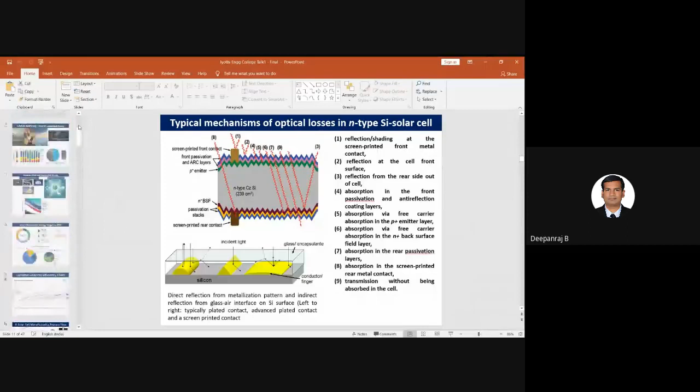Can you see? Yes, ma'am. It is visible. Can you see the first slide? Yes, ma'am. It is clear.

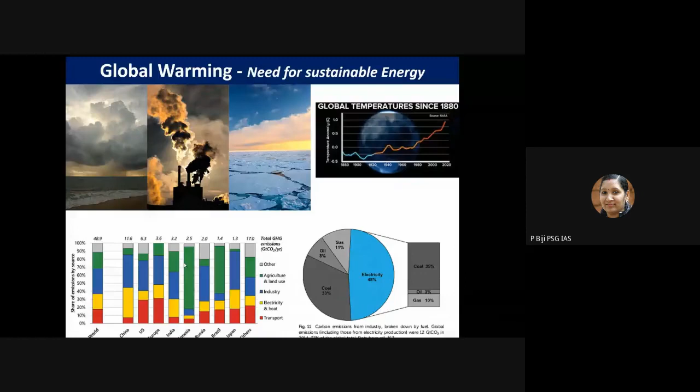This chart shows the percentage share of contributions of carbon dioxide emissions from various sources in different countries. Majorly, the main source of carbon dioxide or greenhouse gas emission is the production of electricity and burning of fossil fuels or coal for various industrial and electricity applications. So the major culprit, of course, is fossil fuels, which is also depleting at a very fast rate at present.

Obviously, we have started thinking about alternate renewable technologies in order to reduce the impact of global warming. As you know, the population is increasing, and hence our energy demand is also increasing. Although non-renewable energy sources like coal, oil, gas, or even nuclear power are used to meet our current energy demands, such resources however are not sustainable forever.

So globally, a huge movement has started towards renewable energy resources, such as solar power, wind, hydroelectric power, tidal power, biofuel, etc. Nowadays we have also started using hydrogen as a clean energy fuel, which can be produced from electrolysis of water using solar energy.

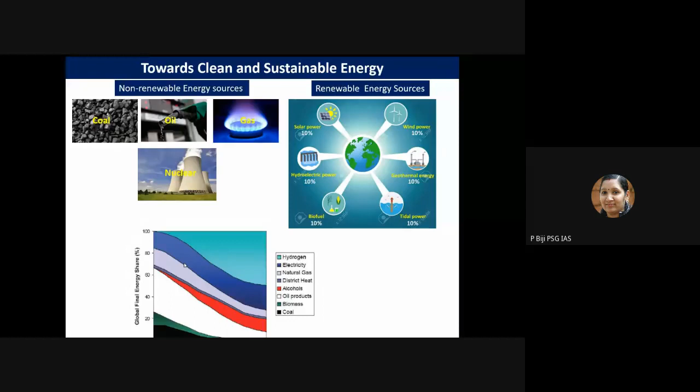Our Government of India has started a huge ambitious target of installing 175 gigawatts of renewable energy capacity by the year 2022, which includes 100 gigawatts from solar, 60 gigawatts from wind, 10 gigawatts from biopower, and 5 gigawatts from small hydropower.

The government has launched several schemes for the promotion and development of renewable energy, including solar energy, in the country from time to time. But at present, India's total installed capacity is around 632 gigawatts, with renewable energy constituting up to around 23%.

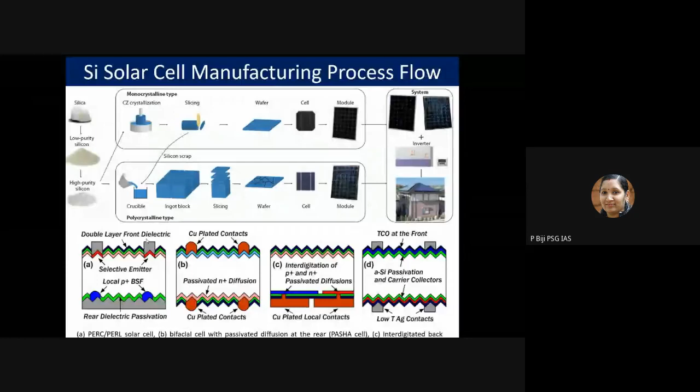I don't want to go into the details of these different types of solar cells, because we need time for our main topic. So let's look at the solar cell manufacturing process flow in a little detail. Once the wafer has been formed, there are several steps involved.

The first step is pre-check or pre-treatment. At this stage, the raw silicon wafer first undergoes a pre-check, during which it is inspected for geometric shape or thickness anomalies, and for damages like cracks, breakages, or scratches present on the wafers.

After the pre-check or pre-treatment process, texturing and cleaning happens. Following the pre-check, the front surface of the silicon wafers is textured, basically to reduce the reflection loss of the incident light. The most common technique is random pyramidal texturing.

After texturing, the wafers undergo acid cleaning. In this step, any post-texturing particles remaining on the wafer are removed from the surface, because the next stage is diffusion. Diffusion is basically the doping, to make the silicon wafer more electrically conductive.

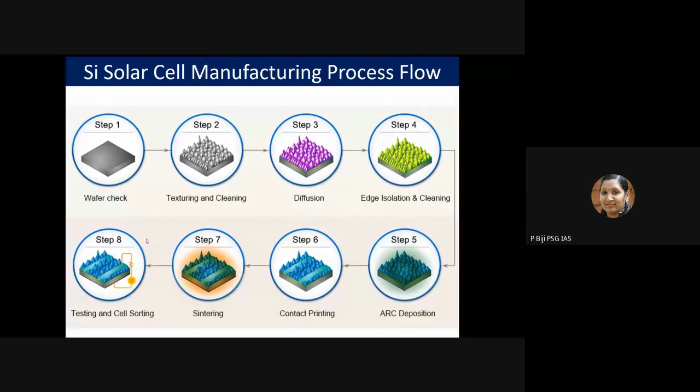Now, having understood the manufacturing of the solar cell, let's slowly come to our topic: why this metallization is so important. I want to give you some basic introduction.

This is basically to reduce the optical losses. Losses in a solar cell occur in two different ways: one is optical loss, and the second is electrical loss. Electrical loss is basically the ohmic losses or recombination losses. These two losses depend on the materials used in the silicon solar cell. I don't want to explain more about electrical losses right now.

I want to concentrate on the optical loss. The optical loss basically happens from reflection loss, then shadow loss, or some radiation - photons which will not have been absorbed in the solar cell.

So because of that, some parasitic absorption, parasitic reflection happens. That also contributes towards the optical loss. So let's see more about this.

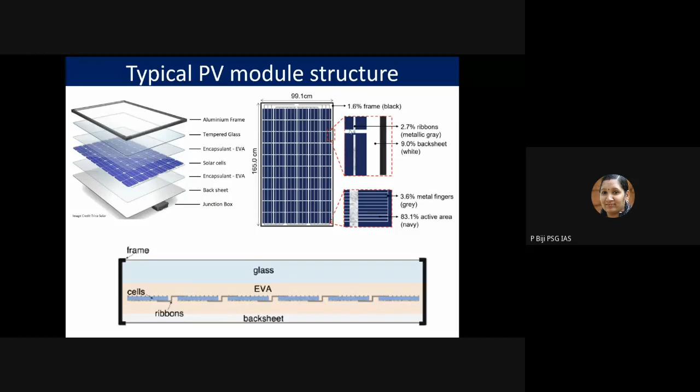Now let's see. We have seen the basic optical losses in the case of a solar cell, but once it is manufactured and assembled as a solar PV module, you have to consider several other contributions towards optical losses also.

The solar cover glass also contributes towards the reflection loss, and the glass can contribute towards the parasitic absorption loss. I have shown some numbers here for these different types of losses.

The third one is the EVA parasitic absorption loss. But of course, these losses are coming from the active areas, which means the exposed silicon area.

This red highlighted ones, like the shading loss of metal fingers, the cell gap photon loss, shading loss from the interconnections and ribbons - these three losses are basically coming from the inactive areas, like metal fingers, ribbons, backsheet, or the frame. From that also the optical losses can happen. So that's the inactive area.

Then further, the front surface reflection loss, parasitic absorption loss in the cells, and front surface escape loss - that's the active areas again, related to your solar cell, which we have already discussed earlier.

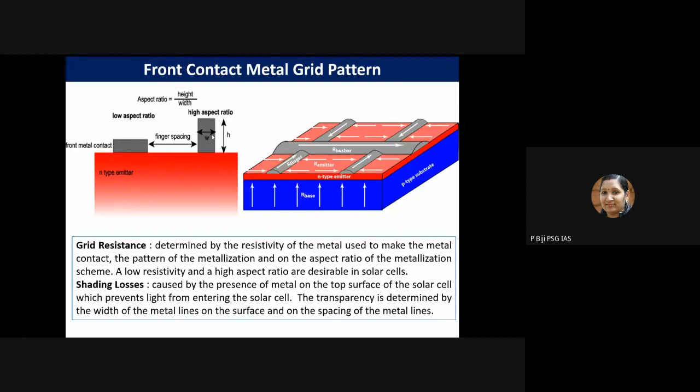Currently screen printing is used, but although it's a mature technology, it has its own limitations. For example, the latest technologies can print almost 30 micrometer line width, but if they try to reduce the finger width further, the finger breaks or interruptions happen, so the technology is not fully successful at this end. A narrow metal line width and closer finger spacing can reduce the emitter resistance loss. That's the basic idea of this front contact metal grid pattern.

Now let's see the overall top surface of this solar cell. Metallization involves several metal line fingers which collect the current from the emitter, and there are bus bars which are interconnected vertically, crossing all these metal lines. That actually transmits the current towards the external load.

If you see this particular figure, it shows the various major components of series resistance in the screen printed or other printed front contact of the solar cell. The series resistance increases from contributions of the sheet resistance of the p-type emitter layer, mentioned as R emitter, and the N back surface field layer, then the bulk resistance of the N-type wafer, contribution from the substrate, then the metallic resistance of the front grid line and rear grid line, then the contact resistance between the screen printed metal contacts and silicon on front and rear sides. The fifth contribution is from the metallic resistance of the front bus bar and rear bus bar. All these different types of resistance contribute towards the series resistance in front contact metal lines, so we need to reduce this resistance also.

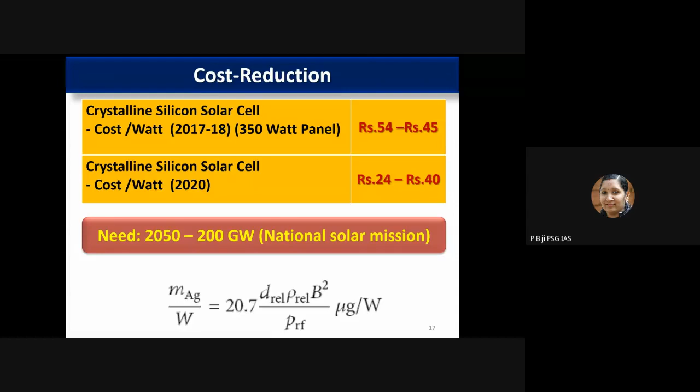As an alternative to reducing silver consumption at the cell manufacturing level, silver should be replaced on a large scale by more effective materials. If you consider copper, that's a very good substitute, but copper has its own disadvantages that we will discuss. However, we can also improve and face that challenge, so I will show you later how copper can be used as an alternative.

The delay in introducing copper into mass production is due to several reasons. You need to face many other technical challenges related to reliability and adhesion, so there are many other challenges which have to be resolved. Only then will solar cell manufacturing technology widely accept this as an alternative to screen printing of silver paste. Appropriate equipment and processes are also required.

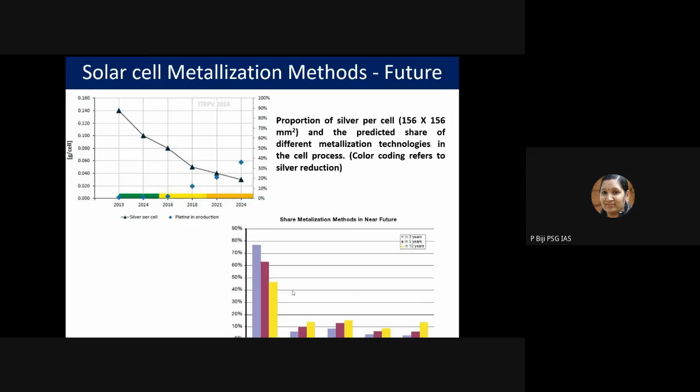Now we'll see the factors influencing cell efficiency and metallization cost. Efficiency can be improved either by improving the current density or by improving the fill factor. Current density can be improved by decreasing the finger width for reduced shadow loss, which is something very interesting for us.

The second one is how to improve the fill factor, basically by reducing the contact resistivity, reducing the line resistance, and improving the aspect ratio. Aspect ratio improvement is a little challenging, but with appropriate technologies it is possible. You can reduce the finger width as well as increase the aspect ratio, thereby contributing majorly to efficiency enhancement.

Now considering cost, how can you reduce it? You have to either replace silver screen printing—but if you reduce it, the cell performance may be affected and other technologies are not so mature—or you can think of a less-silver process. You can reduce silver consumption by adopting various methods available to reduce silver usage.

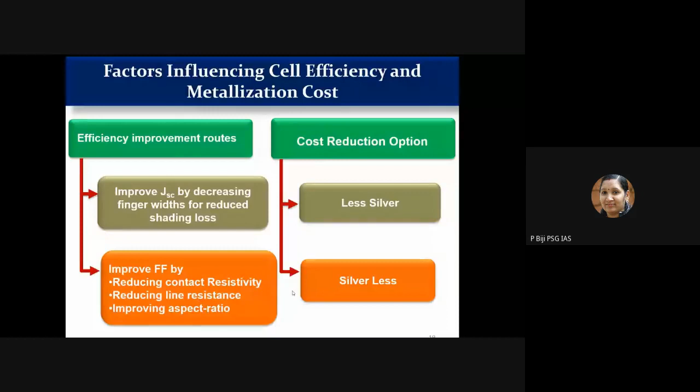What you have to do is alternative metallization. This means using comparable metallization without compromising conductivity, but at the same time the cost of the metal should be very low. So obviously we will look towards copper. Before going to alternative metallization, I want to show you some glimpses of the technologies used for metallization of silicon solar cells.

Before that, since all of you know screen printing is the major technology, we'll discuss it in a little detail. But first I want to show you glimpses of alternative printing technologies used for solar cell front contact metallization.

The first one is inkjet printing, which most of you must be familiar with. In this technology, a continuous jet mode stream of ink is ejected under high pressure through the nozzle. This stream disintegrates into a train of droplets directed by electrical signals. Droplets that are not used are diverted by the electric field and collected by a gutter, where they can be reused. The droplets ejected through the nozzle tip are directed onto the surface using a piezo drive, with XYZ movement achieved electrically, allowing you to print the desired metallization pattern on the silicon solar cell.

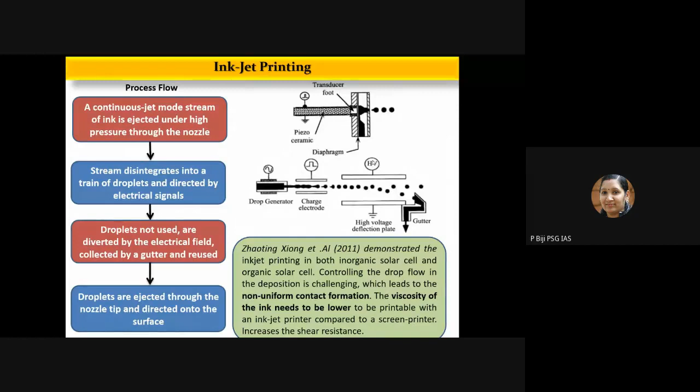The next process is pad printing. In this case, a photopolymer plate with the print image or design is etched into the surface, which is then mounted on the machine by means of a magnetic plate holder.

A blade spreads ink from the ink reservoir over the plate, filling the etched areas. This is a thin film technology, basically the spreading of the ink. The doctor blade moves down and retracts the ink from the surface, leaving ink just in the etched areas.

Then the solvents in the paste start to evaporate and the surface becomes a little tacky. The pad moves downwards onto the plate and rolls across its surface, which has a roundish shape. This rounded surface is important as it prevents air from being trapped between the pad and the plate surface. So when the pad moves upwards, some of the ink sticks to it.

At this point, some of the solvents evaporate from the surface of the paste adhering to the pad, making it a little sticky. Then the plate is moved away from the pad and the pad moves downwards onto the substrate. The ink sticks onto the surface of the wafer and is released from the pad as the pad lifts upwards. That's the main process flow adopted in pad printing.

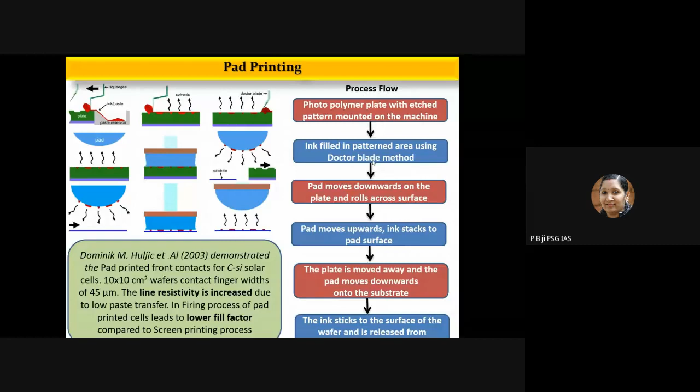Although there are some reports on this pad printing, the line resistivity is increased due to low paste transfer. Then during the firing process, pad printed cells lead to lower fill factor. Obviously, if the fill factor is lower, the performance of the solar cell is not very good, so this was not a widely accepted technology.

The next technology is aerosol jet printing. In this case, there is a metal aerosol jet printer, which is a non-contact system, allowing printing on thin and fragile wafers. At present, most silicon solar cells are very fragile and very thin, so this technology is advantageous for such wafers.

It can also print on wafers having uneven surfaces. The aerosol is transported to the deposition head via a heatable tube, where the viscosity of the aerosol can be controlled. One important component of the ink for solar cell metallization is metal loading in the form of nanoparticle ink—nickel, chromium, titanium, etc.—which could be the materials of first choice for the contact layer.

Again in this case, although this technology is very good for making narrow line width features—up to around 15 micrometers feature size can be obtained very easily using aerosol jet printing—the problem is that the aerosol ink, the nano ink used to produce the aerosol, is expensive, and overall the technology is costly for large area industrial manufacturing. That's why this technology also was not so successful, although it has some good advantages.

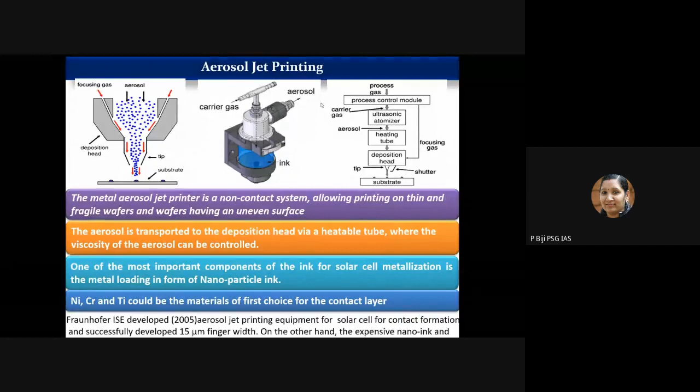The next process is co-extrusion printing. In this case, the co-extrusion print head consists of a multi-layer nozzle assembly clamped between two sealing plate structures. A manifold plate distributes and splits two extrusion materials—a silver grid-line paste and a kind of sacrificial paste. Again, in this case, you can create high aspect ratio features very easily.

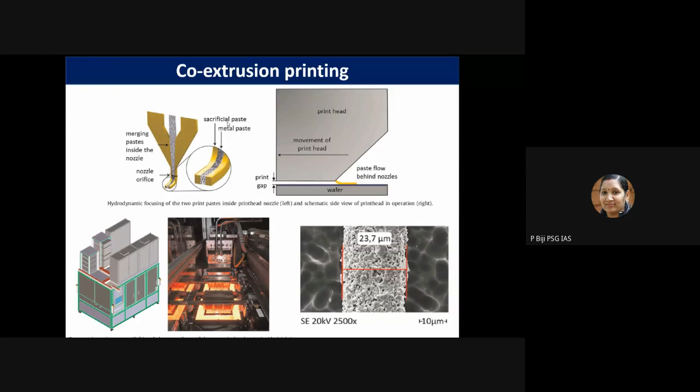Once the line is deposited over the wafer, the sacrificial paste prevents lateral spreading of the metal paste, which enables the aspect ratio. This technology is very good for creating high aspect ratio metal lines, but again the problem is the cost for wider deployment.

This laser beam, with appropriate energy, scans over the particular powder bed. The metal powder is sintered and bonded to the emitter surface.

The main challenge for solar cell metallization is investigating the laser processing parameters—applying enough energy for powder fusing and bonding to the cell surface without damaging the thin, preferably doped emitter surface. It should not be destroyed, but at the same time you can get high aspect ratio as well as narrow line width metallization using this technology. But the processing parameters are very complex, which is why this technology was not so popular.

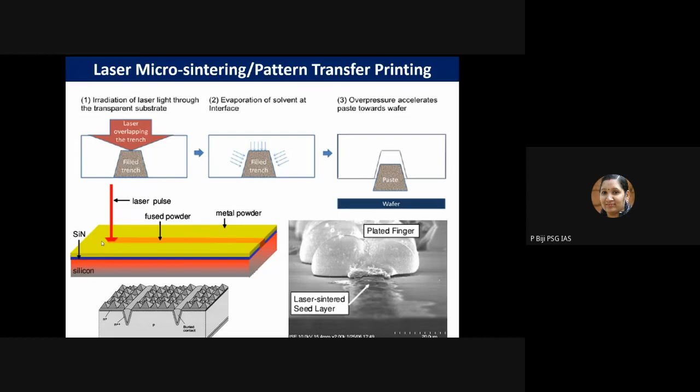And the next important technology is photolithography. Whatever high efficiency silicon solar cells you are seeing in the NREL chart, those kinds of high efficiencies have actually been achieved by adopting photolithography technique. I think some of you must be aware of what is meant by photolithography.

In this case, you need a photoresist, and UV light will be exposed with a desired photo mask. Some part of the photoresist will be hardened, and the other part you can etch out using wet etching or some other physical etching process. Then you can evaporate your metal, and after that wash out whatever resin is present as residual material.

This is a highly precise method for metallization, but unfortunately there are several steps involved, and you need expensive clean room microfabrication facilities for this. So if you adopt this technology for commercial solar cell manufacturing, the cost of the solar cell will be very high. That's one disadvantage of this technology.

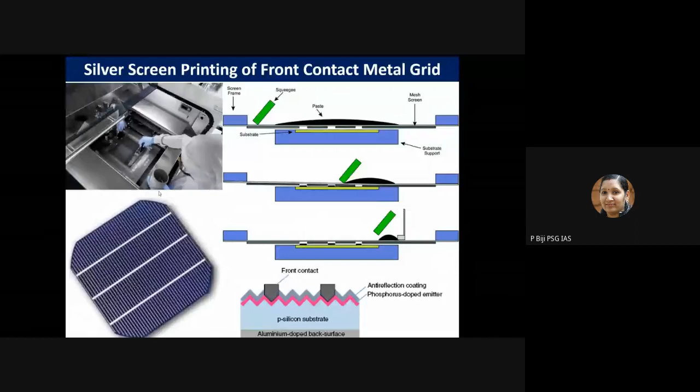Now, if you see the process flow adopted for screen printing for solar cell front contact, I don't want to explain all this texturing, diffusion and all again. In this case, the silver paste also contains aluminium. This aluminium and silver based paste will be screen printed, and then during firing, this silicon nitride will open up, and these metal lines will be in direct contact with the emitter layer. That's how you get very good adhesion, as well as efficient conduction.

Now during this sintering process, initially a drying process will happen, where the solvent burns out, because the silver paste basically contains both inorganic and organic materials. The inorganics are like glass frits and silver powder, along with some polymer additives. The organic matter is like the solvent, because it has to maintain some rheological properties - viscosity has to be optimal - and there will be a resin and some additives as organic matter.

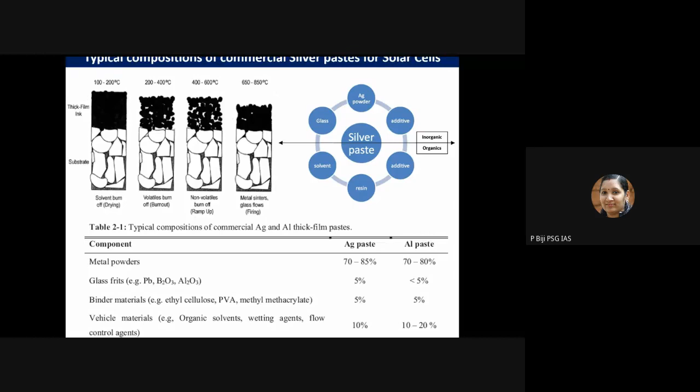So this is what I told, the silver or aluminium. If aluminium is present, some amount of aluminium also will be present, and the glass material will be there. So they will actually form some kind of bimetallic species, and they start to etch out this silicon nitride at its contact, and through that opening, it will be in direct contact with the emitter.

Then the contact also should not be too deep, because the silicon nitride thickness will be around 70 nanometers. It should actually etch out the silicon nitride to have a proper contact, but again it should not over-etch, because that will disrupt the overall process. So there could be some kind of optimal temperature for the sintering process.

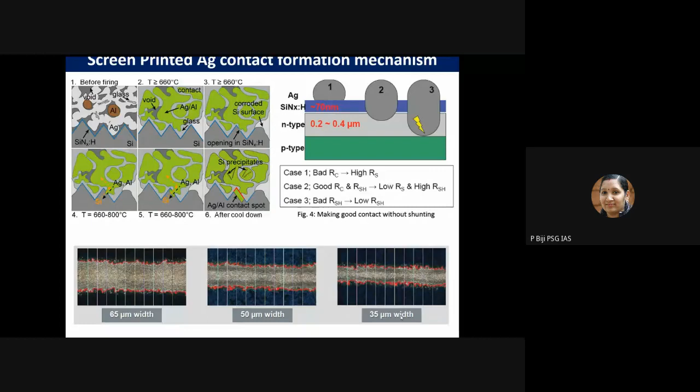Using screen printing, you can see that up to 35 micrometer width finger lines have been printed at this point of time by the latest screen printing technology. So again, advancements are happening. If they are able to reduce the finger width and aspect ratio further, then the technology is okay, good. But still, if you are thinking about cost reduction, you definitely require an alternative metallization process.

During this screen printing process, the agglomeration of silver particles has been observed. The screen opening should be 5 times larger than the particle size, so the silver particle size should be in the range of 3 to 7 micrometers. The finger opening above 35 micrometers is required to avoid screen clogging. So that's one disadvantage, because when you go for narrower line width, the silver particle size reduction becomes another challenge.

So that is something you have to think about. Then another disadvantage is non-uniformity in the fingers. If the lines which are printed are non-uniform, that will increase the shear stress, and that will increase the resistivity of the finger. As you reduce the finger width, the possibility of finger interruptions or finger breaks will be enormous. So that is another challenge to think about. Such non-uniform fingers will increase the series resistance. So these are some of the disadvantages of screen printing of silver paste.

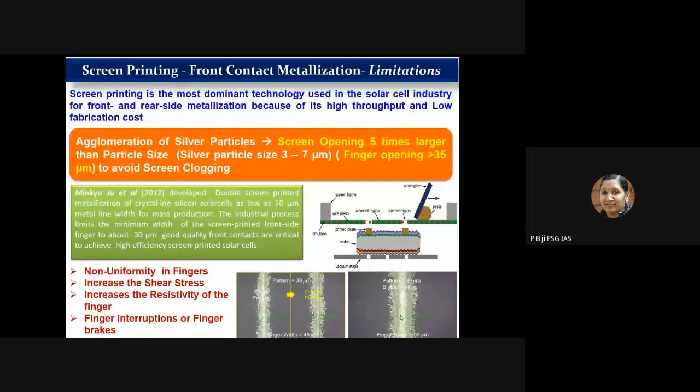As an alternative front contact metallization, some groups have reported TCO, transparent conducting oxide, because in that case it's a transparent conductor, so obviously you can expect that the shading loss can be reduced. But the technology they were using was photolithography, so printing is very difficult in that case, and the cost was very high, although the efficiency was very high.

Then the world's highest efficiency was actually made by the expensive lithography process. Multi-metal was evaporated as stacks like titanium, palladium, silver. But you see, those other materials are also very expensive. Palladium is very costly compared to silver. So that technology also was not so very successful.

The current scenario is that there are several printing metallization techniques like screen printing, inkjet printing, aerosol printing. Then two techniques which I have not mentioned are nanoimprint lithography and maskless lithography. That technology we have actually developed in our laboratory, so I will discuss that sometime later. Such technologies also have very low silver usage, or you can also go for a silver-less process using nanoimprint lithography and maskless lithography.

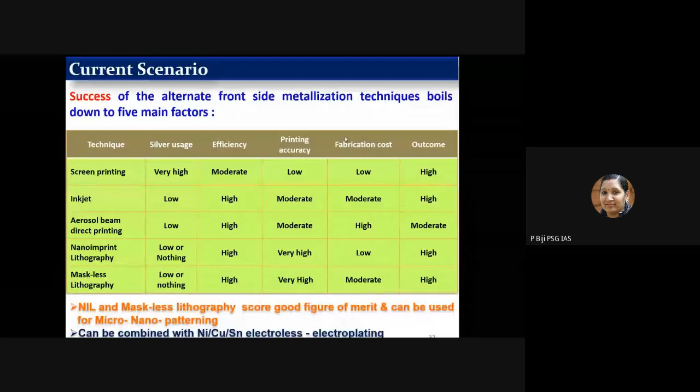So now let's see. A second.

Now I have shown two schematics here to describe what is meant by this alternative metallization. In the first schematic, picture A, you can see that two screen printed silver contacts are printed on the surface of the silicon solar cell.

In the second case, there is a difference in this metallization. It's a less-silver process. I have a nickel contact as a seed layer, and the main conductor is the copper contact, and on top of that I have an Ag capping layer. This is one of the alternative metallization processes which can be considered.

In this case, silver usage is going to be very less, but at the same time you have a kind of complementary conductivity. If you compare silver, copper and nickel, the conductivity is comparable. Silver conductivity is almost 61.39, and copper is very close, 59.10. So there is no significant decrease in conductivity, both are almost comparable. So you can actually use copper in place of silver.

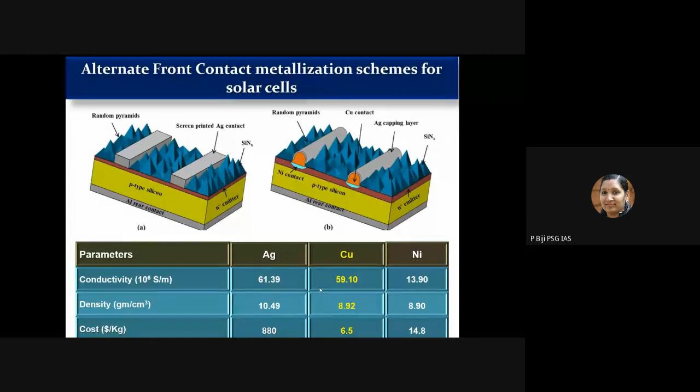So this can be considered a good alternative metallization for solar cells. Looking at nickel copper contacts, in the previous slide I used silver, but you need not consider silver. If you go for a silver-less process, the purpose of silver or tin is only to act as a capping layer, to prevent oxidation of the copper and protect the metallic fingers. That's the purpose of using the capping layer.

So the first stage is the nickel seed layer deposition. You can use either electroless deposition, light-induced deposition, or laser-assisted deposition. There are many methods for nickel deposition. You need a maximum of 100 nanometers of nickel seed layer, or less than that.

After that, you need a sintering process because you need to produce nickel silicide. Nickel silicide formation is in the range of 300 to 400 degrees Celsius. After that, your actual conductor, the copper electroplating, can be done. This can be done using generally electroplating, or there are many latest technologies like light-induced plating or electroless plating. I prefer electroplating for copper.

And the fourth one is silver or tin. Silver is not necessary because the purpose is only to prevent oxidation of copper. So we can prefer tin plating as a capping layer. That completes the metallization.

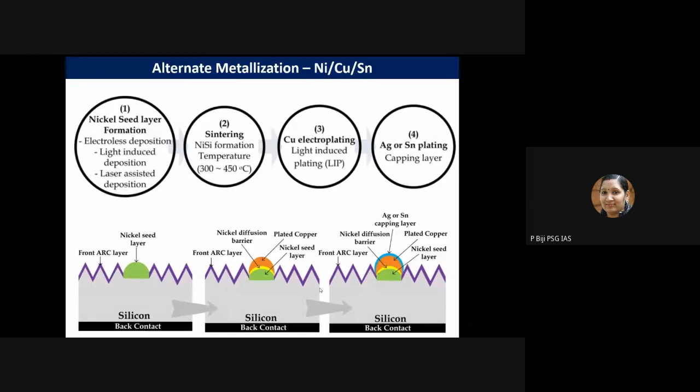Because you need direct contact between the metal and your emitter layer, a nickel seed layer will be deposited in the openings of the ARC layer as per your design pattern. After that, sintering happens, and then copper will be electroplated over the nickel seed layer. After that, a capping layer, like silver or tin, can be deposited.

So that's basically the metallization steps involved in this alternative metallization. Nickel can be deposited using electroless plating, which is very simple.

This electroless plating is a kind of autocatalytic process, in which plating can take place on an activated substrate. You need activation of your substrate without the need of electrodes or current flow. Unlike electroplating, you don't have to apply voltage in electroless plating. Electroless deposition involves reduction of metal cations by electrons obtained from the reducing agent.

If you see the electroless plating bath composition, there is a source for nickel, such as nickel sulfate or nickel chloride. There is also a reducing agent, typically sodium hypophosphite. Next, a buffer or mild complexing agent is used to control the plating rate.

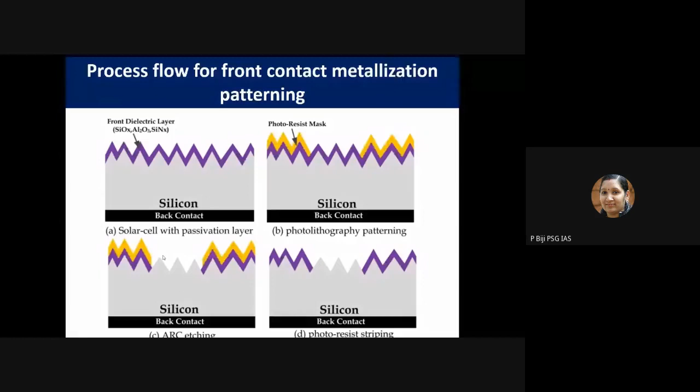That's nickel electroless plating, seed layer deposition. After that, as I have already explained in the process flow, using photoresist or nano-imprinting, you open up the ARC layer. I'll explain this later. Using wet etching or reactive ion etching (dry etching), you remove the silicon nitride, and after that, electroless nickel plating happens.

Then your next target is to deposit the actual conductor, which is copper electroplating. Initially, after electroless plating of nickel, you need a sintering process, since nickel silicide has to be formed at a temperature of almost 300 to 450 degrees Celsius.

After that, you need to deposit copper, which is generally electroplated as the front conductor. Copper sulfate along with a copper anode is commonly used for electroplating copper. You need to apply an electric field; due to this applied field, the positively charged ions migrate towards the cathode, while negatively charged ions move towards the anode. Reduction happens at the cathode side, and the cathode side is your wafer.

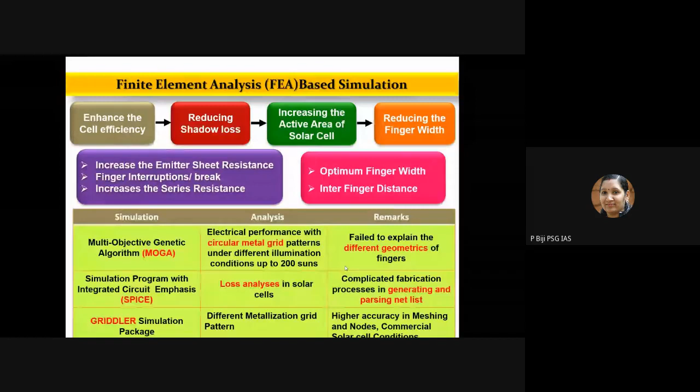Before that, we carried out some simulations. We used GRIDDLER simulation for the metallization grid, because we need to optimize the finger width, the interfinger gap, and the aspect ratio of all those things. So we used this simulation package, GRIDDLER, which does finite element analysis based simulations. This GRIDDLER simulation gives higher accuracy in meshing and generating nodes, and we can also use commercial solar cell conditions during these simulations. Different metallization patterns can also be adopted.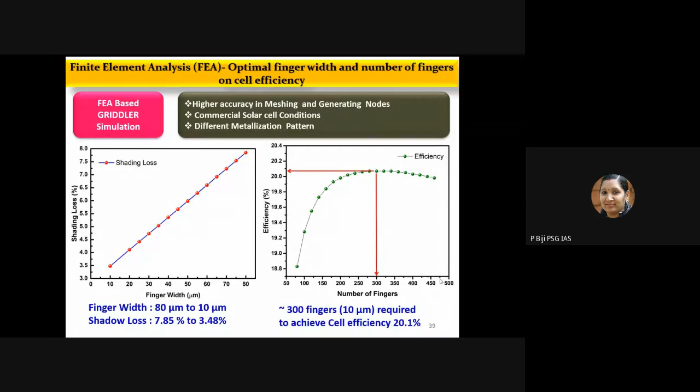We also know that, so we tried to do the efficiency calculation in terms of number of fingers. If you reduce the finger width, you need to increase the number of fingers. For 10 micrometer fingers, we found that almost 300 fingers are required to achieve an efficiency of 20.1. But unfortunately, if you increase the number of fingers like this, 300 lines of 10 micrometer, there are processing challenges, and you can expect several finger breaks. So you have to avoid that kind of reduced dimension.

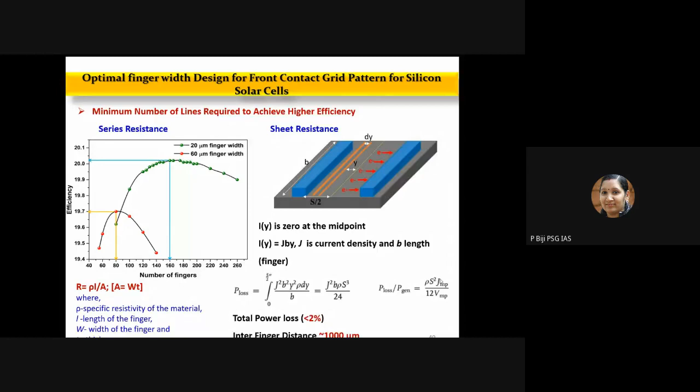So then further, we also checked the 20 micrometer finger width, for which we compared the efficiency to the commercial solar cell finger width, that is 60 micrometer finger width with 80 number of finger lines for commercial solar cells. Whereas for our solar cell, it was 20 micrometer finger width with 160 number of fingers. We could see a change in efficiency - compared to commercial solar cell, there is an increase in efficiency, almost 1% improvement observed. We also calculated the sheet resistance based on simulations. The total power loss was calculated as less than 2%, and we also optimized the interfinger distance, which was found to be 1000 micrometers.

Then I will quickly go through - we also optimized the number of fingers for 20 micrometer line width. From this we understood that the finger width of 20 micrometer with 160 number of fingers could show enhanced fill factor as well as enhanced efficiency. So now the optimal dimensions are: line width is 20 micrometer, interfinger distance is 1000 micrometer.

So then for patterning, on the experimental side, we used NIL, which is nano-imprint lithography. Since time is limited, I will not explain this in detail. We have two types of NIL process: one is thermal NIL and the other is UV NIL. In thermal NIL, there will be a resist coating and

an imprinting mold, which we have to fabricate ourselves according to our design. And then there will be a thermoplastic or polymer resist - you can either use a polymer or a photoresist on the surface of the substrate silicon wafer. Then you bring down this imprint mold towards your polymer resist film, and heat will be applied, because the polymer has to be a little bit soft to have a proper molding or stamping process.

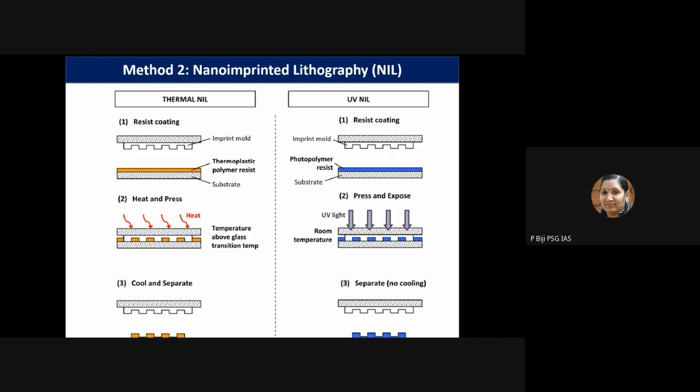Nano imprint lithography tools in high-end laboratories are very expensive, costing in crores. That costly technology we have designed, manufactured and fabricated in our own laboratory. The only costly component is the actuator, which costs around 4 to 5 lakhs, so the total cost is around 7 lakhs.

We can actually manufacture this nano imprint lithography tool. So if any of you require this imprinting tool to be purchased, you can purchase from us. We can make it.

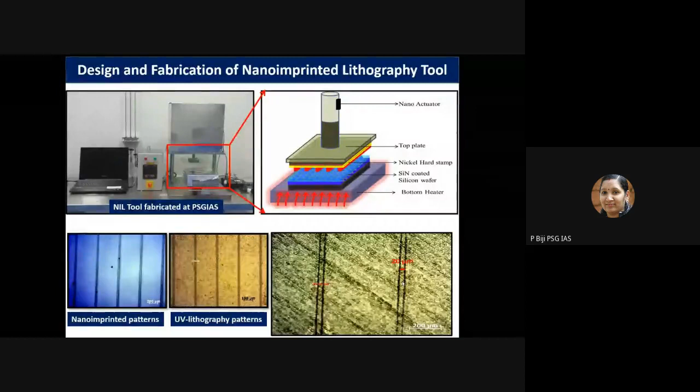This is the imprinted lines, optical micrographs of the imprinted lines. You can see that 20 micrometer features have been very successfully imprinted on these patterns. We have also published a paper based on that, where you can see more details.

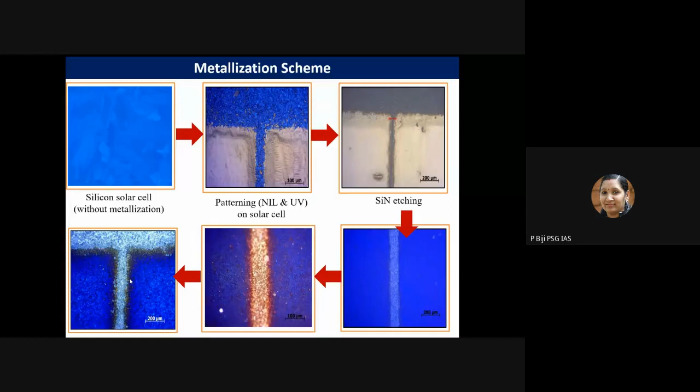After that, silicon nitride was etched, and nickel electroless deposition was carried out. After sintering, copper was electroplated, and then a tin encapsulation layer was fabricated. The final outcome is like this: the bare solar cell without metallization we got from industry because we had a collaborator in Adani Solar.

He supplied us this bare solar cell. After that, we did copper electroplating and tin electroplating. Right now, I have not shown those data.